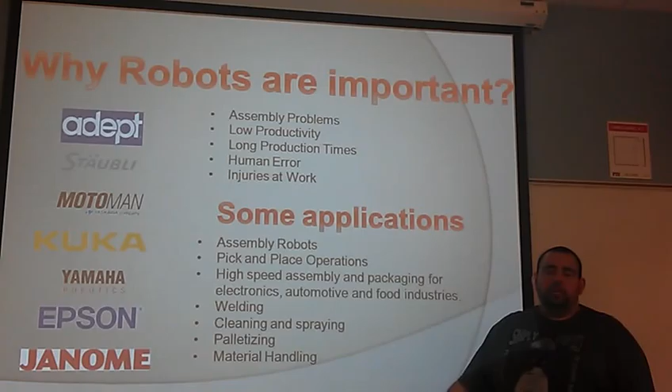Okay. Our project is based on a SCARA robot. SCARA stands for Selective Compliance Assembly Robot Arm. So I'm going to explain a little bit how these robots are being built right now in order to get better accuracy and better development. They're going with encoders to take over the step motors. This is for better accuracy in the positions.

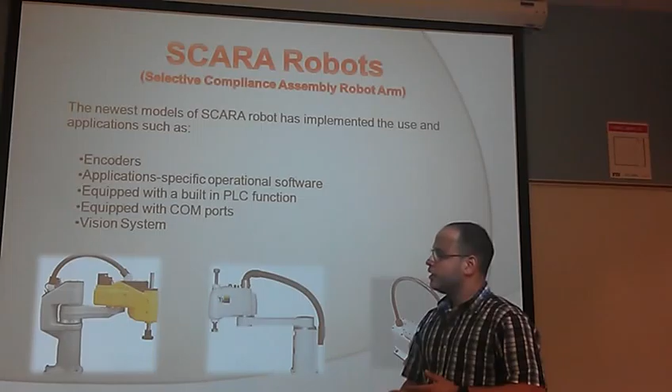Not only are you going to be able to control this robot, but by this program you're going to be able to control the machines around this product. So they come equipped with comms ports. Before, you were able to get communication between these machines using very unique computers, very unique software and hardware. But now they come with comms ports.

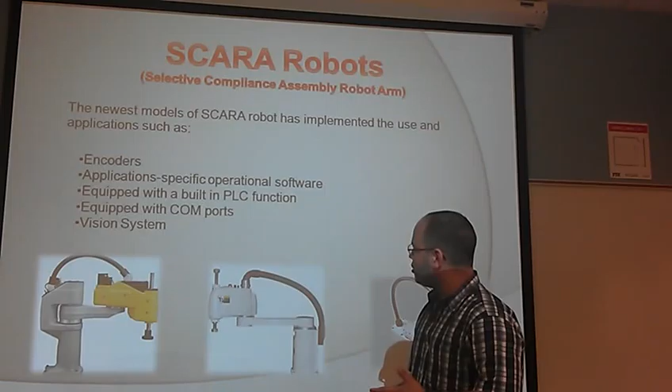So with a Windows-based software programming computer, any kind of computer, you're going to be able to get communication between them. Besides that, they come with vision systems. Besides the encoder and the PLC functions, the vision system is to get better accuracy and better development throughout its task. Okay.

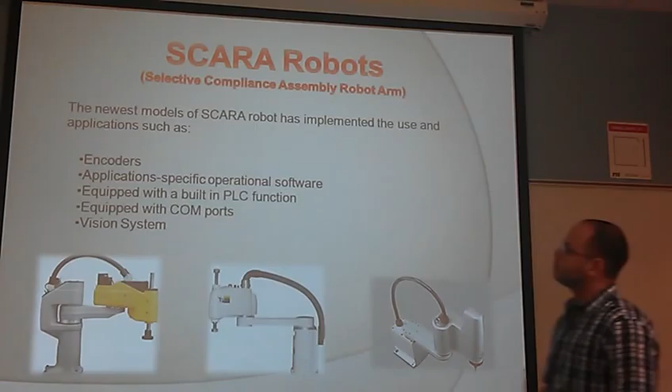Those are some of the advantages of SCARA robots. The first one, these kinds of robots are fast, they're clean, and they are smart. They have a smaller footprint in their movements. Improves due to the predictability of the cycle times, and also they improve the process flow, the product quality, and the costs. They also reduce the capital cost and increase the manufacturing flexibility.

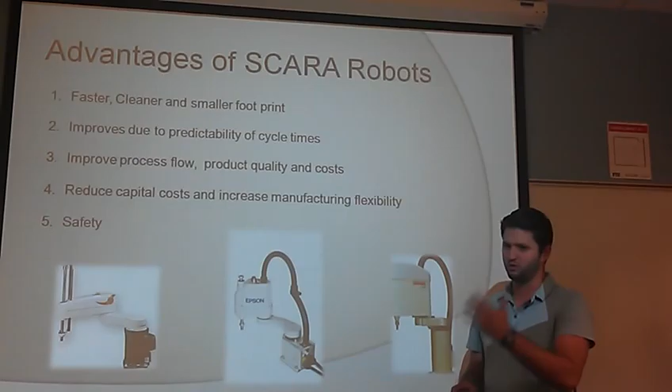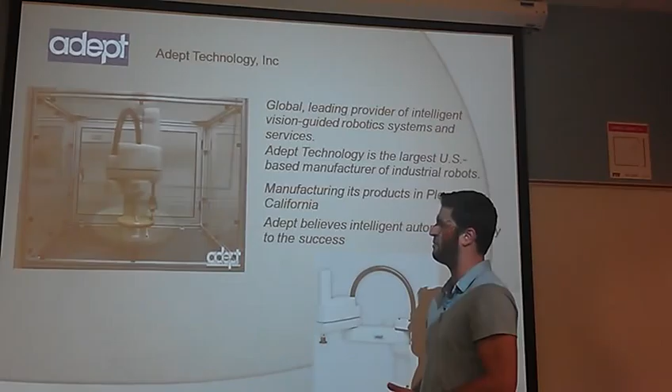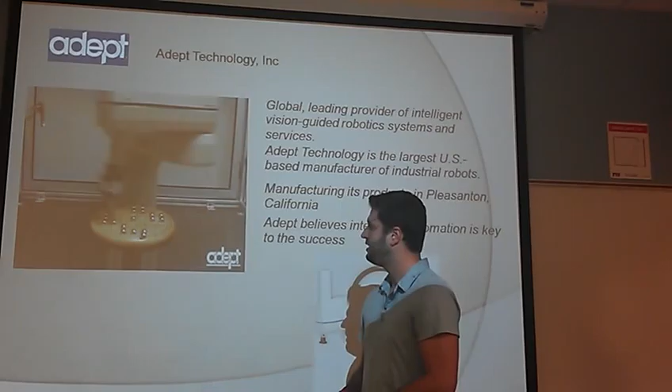And one of the most important is they're safe. They're safe in the work environment for the people around there, the workers, and they perform the tasks that you want them to do. This is basically one of the videos from a company. It's one of the manufacturers making robots here in the United States. This is an example of how fast they move and how precisely they move. They do it in an efficient way and in a smart way.

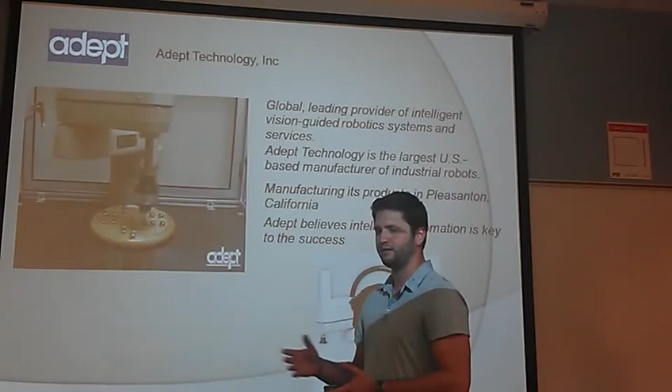They perform different kind of tasks, and they're very efficient. Okay, that's the end of the research process that we did in this kind of field.

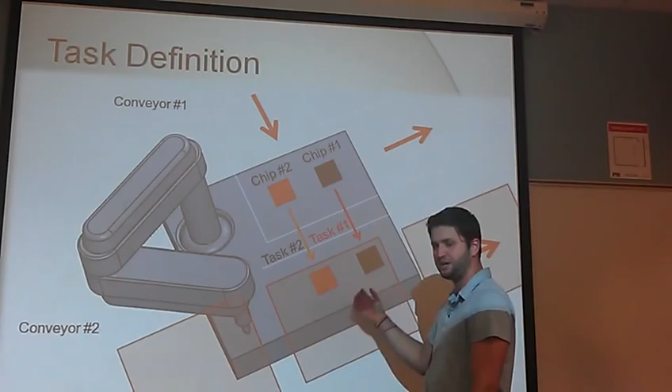This is the design part of the project. We create a robot that will perform two tasks. We decided to do this SCARA robot, and the first task that we do is to move a chip from a conveyor and to put it in the second conveyor that will be a motherboard waiting for the chip. So the first task basically is move the chip from here, and the second task will be move the second chip to the conveyor to another one. So basically this process will be continuously doing it and assembling the motherboards.

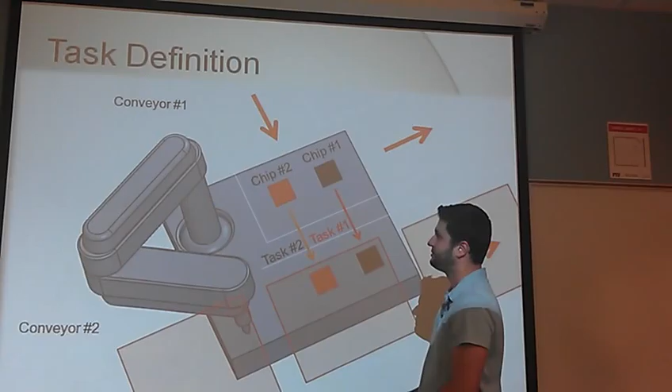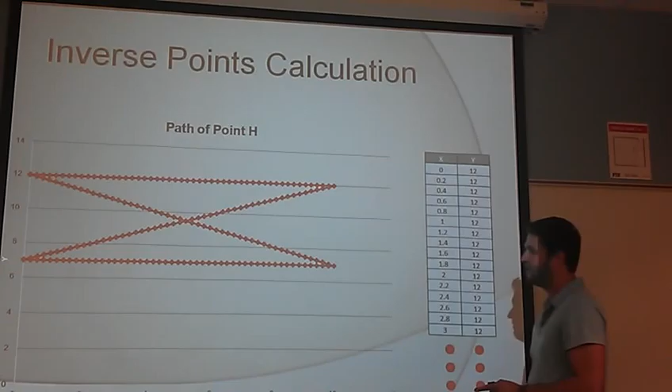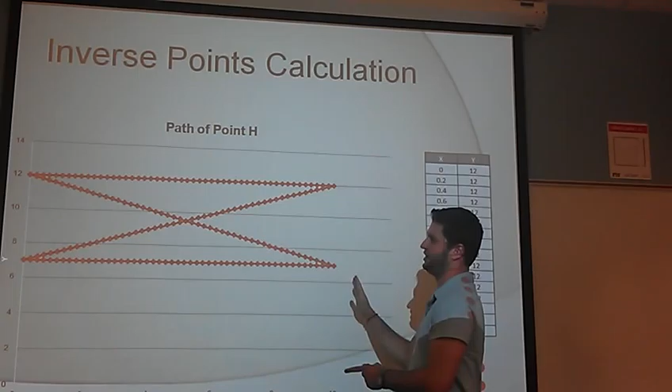So here, in order to create those two tasks, we calculate the path here. This is an example of the table of the X, Y points. Here, this is basically the line of the task 1, where the chip is located here, and you move from there to here, and then the second chip will be here to the motherboard that we place over here. So this is basically the movement of the two links of our robot.

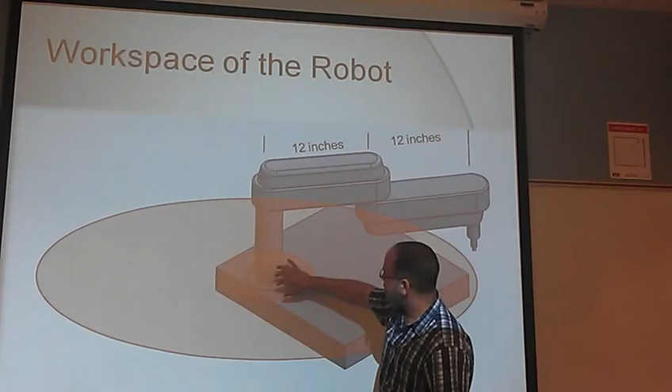Okay, this graph shows the workspace of our SCARA robot. As you can see, we have two circles in here. The big one symbolizes the singular position of our robot. I mean, this is the maximum range that our robot is going to have. But the little one in here is not a workspace for the robot because of the kind of mounting that we're using for this robot. In order to take advantage of the whole workspace, instead of using the floor, we're going to have to mount it from the roof or from top of that robot. But that's what we wanted to explain in this graph.

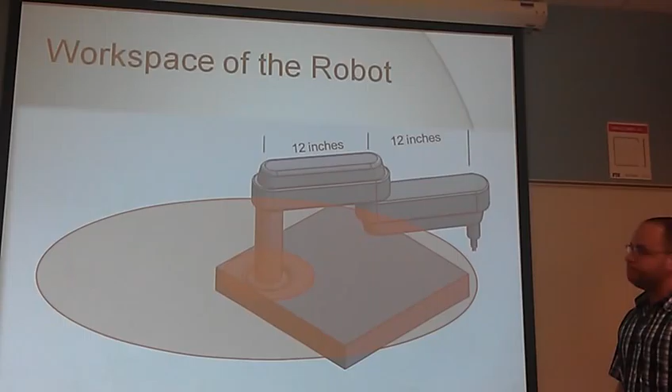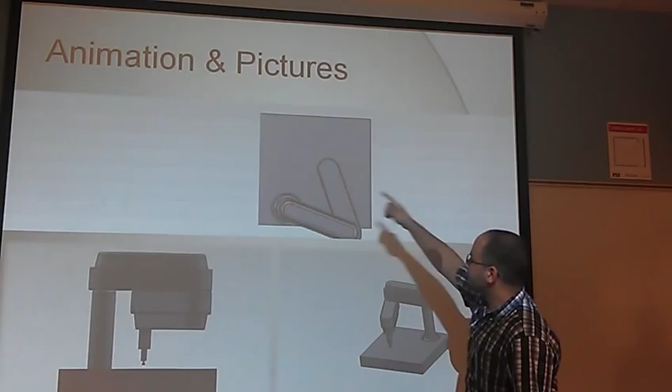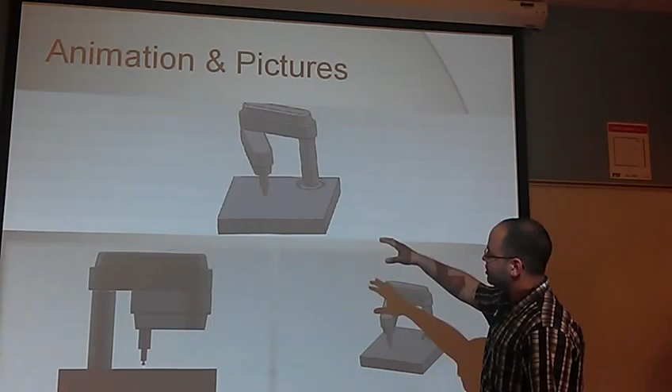Okay, as you can see, this is a simulation of a robot. You see, it's going through the path that we set up for the whole study of this project, the path that we picked before and Alex explained before. It's very important to explain that this is a 2RP SCARA robot, but we didn't take into account the prismatic joint because of the simplicity of the project. So we took into consideration just the two R's to do our calculations.

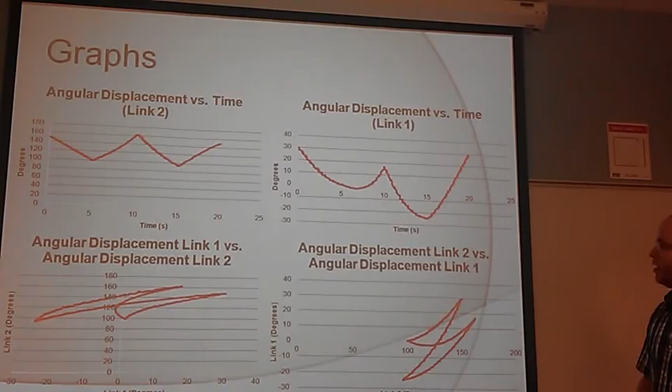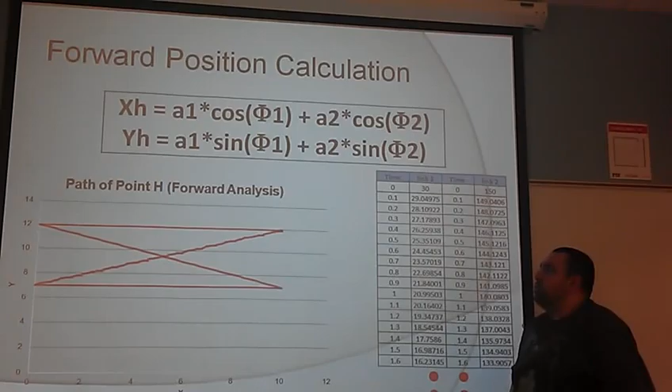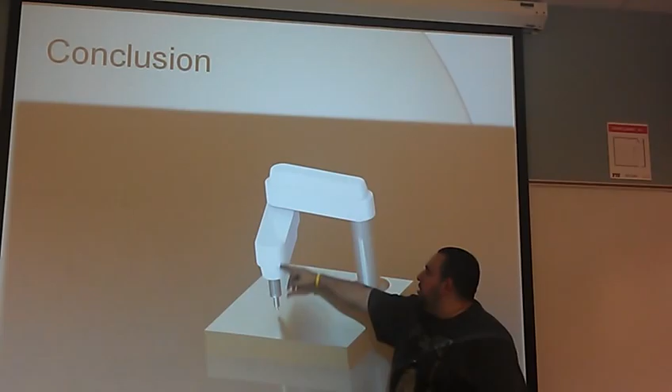In conclusion, we would like to point out that this type of robot is used in electronic assembly due to the fact that two of the joints are not in the plane of the third joint. So the loads in this part of the robot do not create torques or forces. They do create them, but they don't create motion relative to these two joints. So the application here is very precise and accurate. This is extremely important for circuits and chips and things like that are very small. So this is our project.